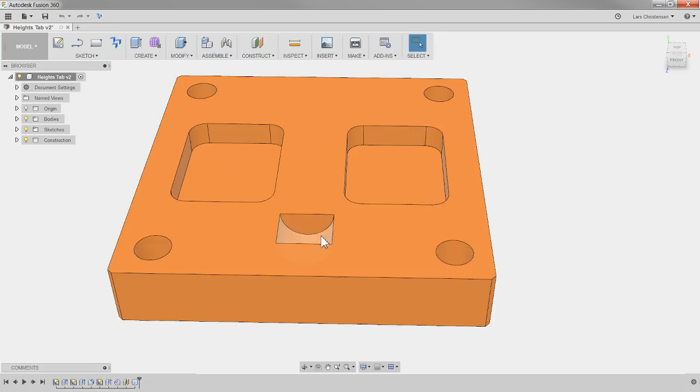Let's go ahead and talk about the Heights tab because somebody is watching this video just for that. Thank you so much, guys. So I have this model here, and I just kind of modeled this up. There's nothing too fancy about this. We got a couple of pockets, kind of this cylinder shape down here, and we got some holes.

What I wanted to do was—I really hate when it turns into a cooking show where everything has already been prepared—so I actually wanted to go into CAM and start from scratch and throw some toolpaths on this. If you've never seen CAM before, you can kind of see the process here. We're going to talk about the Heights tab. The Heights tab is kind of like the distance the tools are moving between pockets or holes or something like that, so it's pretty important. I'm going to show what I think are some pretty neat tips with that.

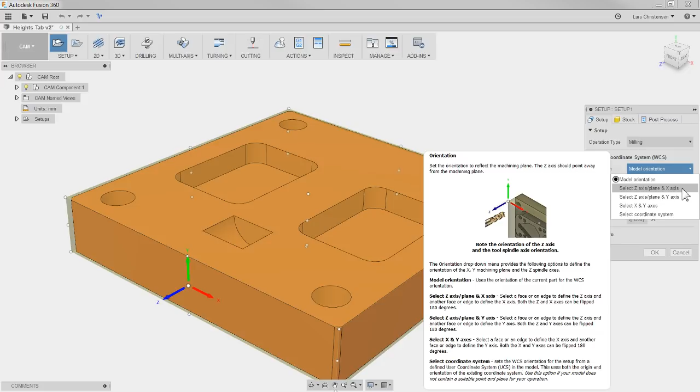Let's get going. The first thing you do in CAM is hit setup, creating a setup. Normally, I always use only the Select Z X plane, I don't use any of the other ones. I've talked about this in the past, so I'm not going to dive too deep into it. I'm just going to select the top of the part here.

Now there's a couple of things that's going to be important when we are talking about the heights. We're talking about the tool moving around on this part, and we're going to dive pretty far into this. But one of them is, where are we picking up the part? We're doing that by normally selecting like a box point. If you're selecting stock box point, you need to know that you're selecting whatever you have in your stock options for the top offsets.

Normally you're leaving a little bit of material on top. Now you got to decide, when you're touching the tool off, if you're touching it on top of the part, or if you are going to subtract whatever. Let's say there was no material left on top—then you would not have any, you could make this 0, the stock top offset. Or you could go in here, instead of doing a stock box point, you could select model box point and select a point.

So that's just one of the things to keep in mind. We're going to see this happening as we go through and talk a little deeper about this. Right now, I'm going to leave it on stock point, meaning there's a millimeter of stock on top of our part. I'll hit OK to that, and let me apply some toolpath.

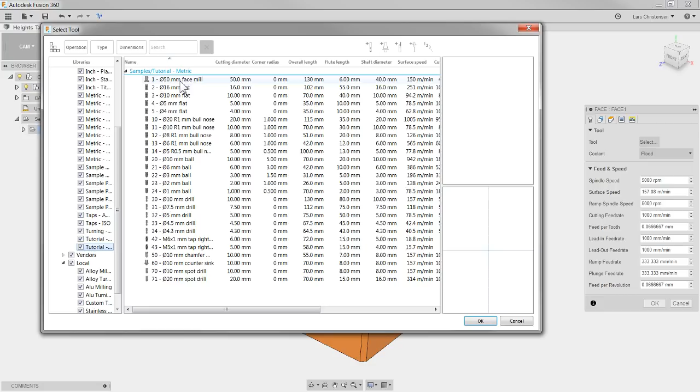Normally when we apply toolpath to a part like this, we might start with a facing operation. I'm going to click on that one and go in and select a tool. Bear with me as I create these tools from scratch without going into all the settings. I'll select the 50 millimeter face mill, select all the tools and operations, then go back into the height tab. Selecting the tool is always the first tab.

Because I'm just facing off this block, I don't actually have to select any geometry. I'll hit OK, and now I have a facing operation here that you're now aware of. If I go back in and edit that operation, yes, we have the height tab here—this is the one we'll be talking about in a few minutes. I'm just going to add a couple more operations.

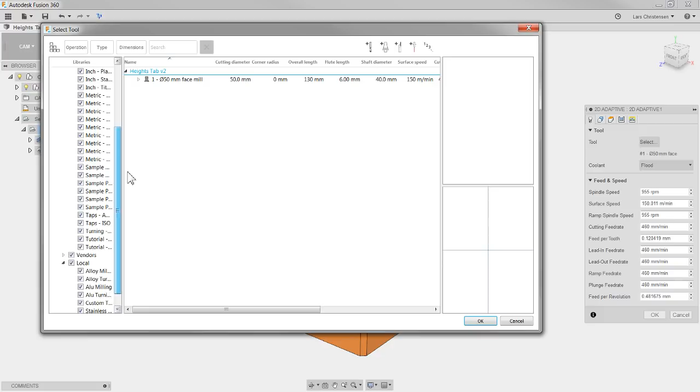So we faced off the part. Maybe we also want to rough out these two pockets—we could use a 2D adaptive clearing for that. I'm going to select a new tool for that, since we don't want to use a face end mill. I'll select from the tutorial metric library here and pick the 16 millimeter, then go to the geometry tab and select the two inner circles.

Again, here you'll also see the heights tab—that's the one we're going to talk about. The reason I'm selecting multiple operations is because the height tab does different things depending on what operation you're in. So there are our two pockets roughed out.

Now that we've roughed those out, we might want to finish them. Normally we use a 2D contour for that. We might select a smaller tool, but right now I'll just leave it at the 16 millimeter and select those same two diameters.

That gives us a finishing operation for that. I might also want to take a pass around the outside, so I could use that trick: right click, create derived operation, go into 2D milling, and find that same contour toolpath. That means all my settings, if I customized anything in the different tabs, get carried over. The only thing I have to do is deselect the two chains and select the outside.

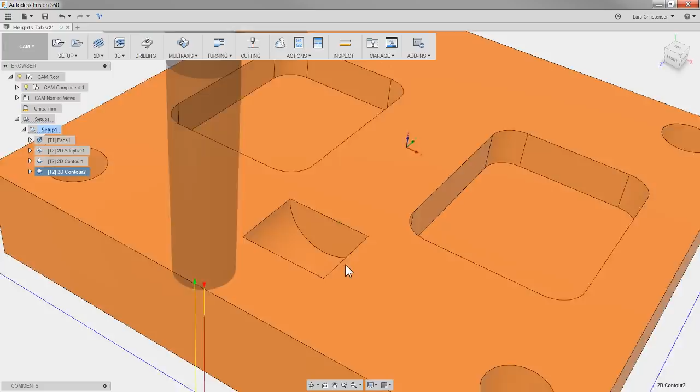So if you didn't know about that little trick—now. I'm also going to do 3-axis toolpath on this part, because height tabs are still important when it comes to 3-axis toolpath. I'm going to rough out this little oval pocket right here, just bear with me. I'll select a slightly smaller end mill since it's a pretty small pocket—the 10 millimeter flat end mill. Now, I've done a live stream on selection within machining geometry on 3-axis, so if this is fairly new to you, I'd recommend checking out that live stream.

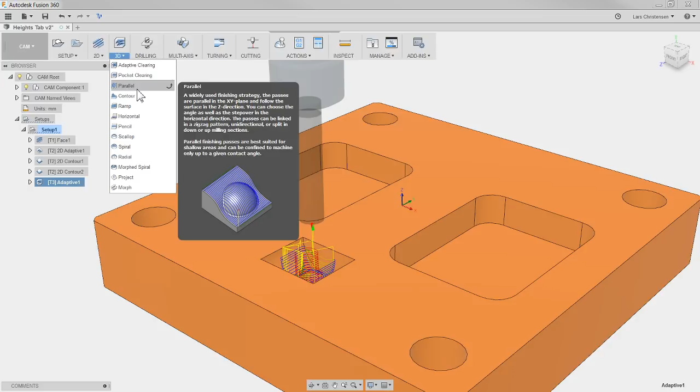I'm going to say I want to machine the cavities and probably also leave some stock here, and that will rough out this pocket. Then we're going to finish it—for that I'll use parallel cuts. Again, I've created videos on some of this 3-axis toolpath if this is brand new for you, but I just want to make sure that when we're done with this live stream in 20 minutes or so, you have a full take and feel comfortable with the height tab.

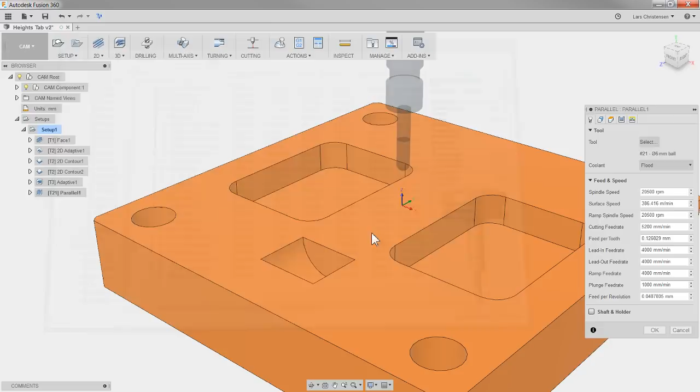So I'm going to select the 6 millimeter ball end mill, a little smaller than the 10 millimeter we just used. Again, go into the geometry here, and I'll also select the boundary—I like to use this contact point boundary for that. Let's hit OK.

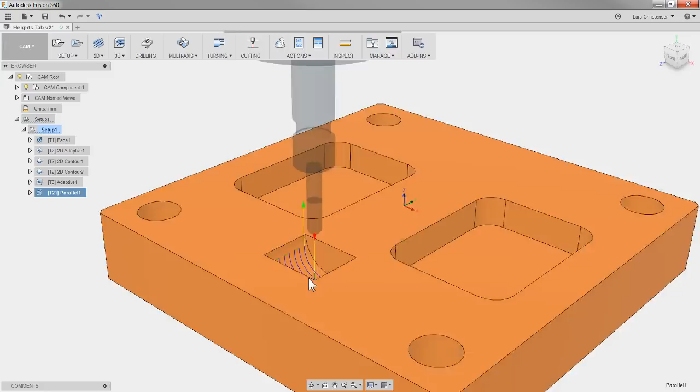That looks somewhat decent down there. That's a good toolpath. Maybe if you're machining this in real life, you'd probably have a lot smaller step over. All right, to wrap this up, I'm just going to do a drilling.

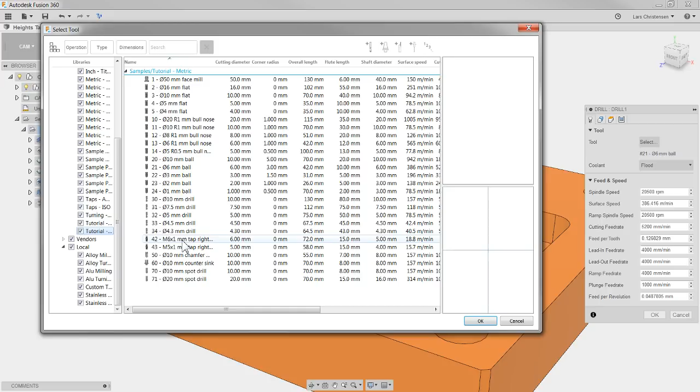I've been through, I'd say, most of the standard toolpaths there are, and we can then start talking about this Heights tab here that I'm trying to get at. I'm lazy, so select same diameter, click on that there, and it will drill these holes.

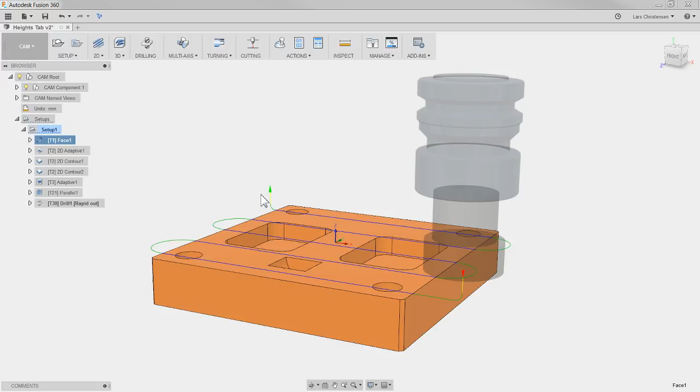Okay, so we created a handful of different operations in here. And when we're talking about the Heights tab, we're talking about, if I click on the facing tool, how the tool is going to approach the part, machine the part, and then how it's going to leave the part again to go to the next toolpath, which in this case is the adaptive, and it will enter the part.

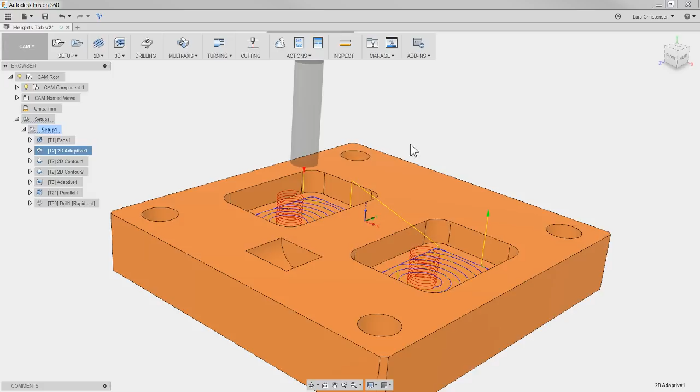But then the interesting thing comes when it's got to make this jump across to the second pocket. That's where I think many people get a little bit confused when it comes to tweaking things in here. So I hope this wasn't too long a setup to getting to the point, but let's go in and digest the different types of toolpath and start tweaking them, talking about the Heights tab.

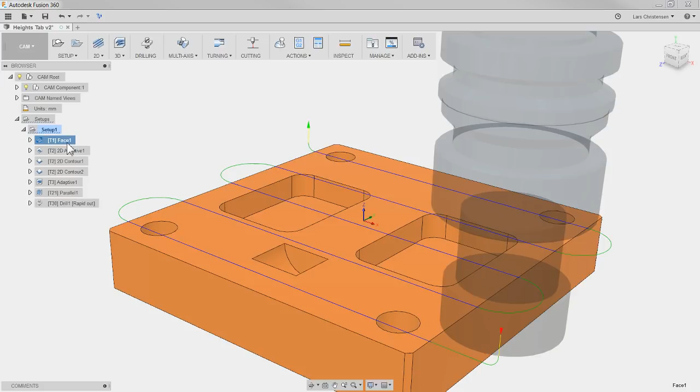The reason I didn't just do a facing operation is because if I right click and hit edit on the facing operation and go over to the Heights tab, you'll see there are actually 5 different categories in here. But if I go to the adaptive and hit edit and Heights tab, you'll see there's only 4. It's kind of funny. I think most machinists would tell me that facing operations would be a lot simpler than a 2D adaptive, but for the Heights tab, actually not so much.

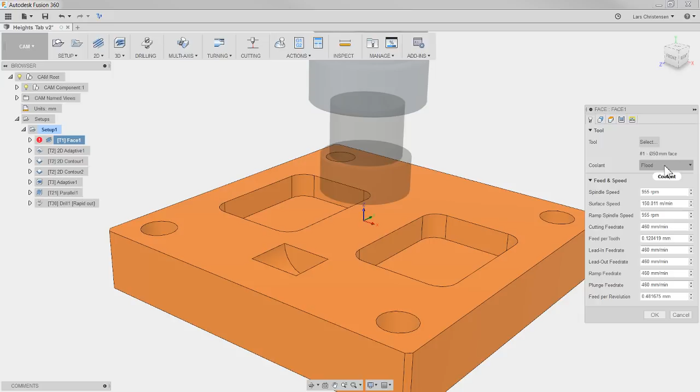So here's the trick when it comes to the Heights tab. I always tell any training classes I do in CAM: start from the top and work your way through the different menus. So when you get in here to tool, select your tool, choose your coolant, make sure your feeds and speeds are right, go into your selection, make sure you've got that selected. Now when it comes to the Heights tab, I actually recommend going from the bottom and up. Start from the bottom and work your way up.

The reason for that is that if you've ever programmed a CNC machine, the bottom is normally your first concern. How deep is this end mill or drill or whatever tool actually going down to, what is the lowest level it goes? And if you start with that, you can work your way up.

So in here, you'll see that by default, the bottom depth right now is set from model top. Now, if I hover over it, I get this Cheesecake Factory of a menu that shows up here, showing you all different kinds of things. Get a cup of coffee, read through this—it's good information and definitely a lot helpful.

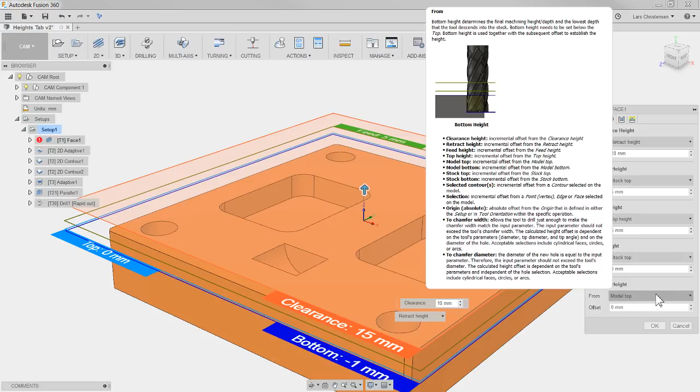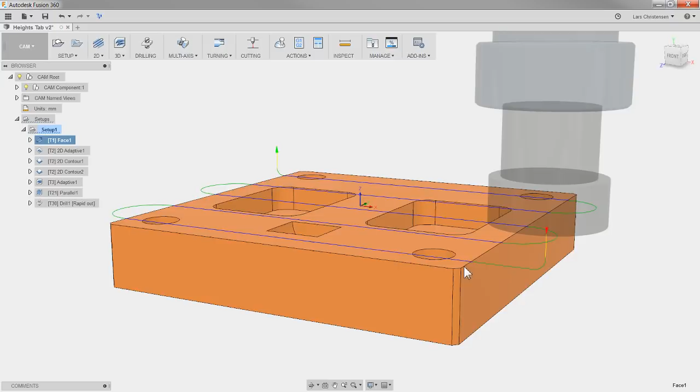Now what happens when I click on the drop down is you'll see I can choose where that bottom height is—let me click outside. So by default here, for this facing operation, it's set to model top. That means when our tool is approaching the part, it's not going to machine any deeper than the model top. But that's good, right? We can breathe a sigh of relief, because if a face mill went down to the bottom, that would be ugly. So that's where you can look at that.

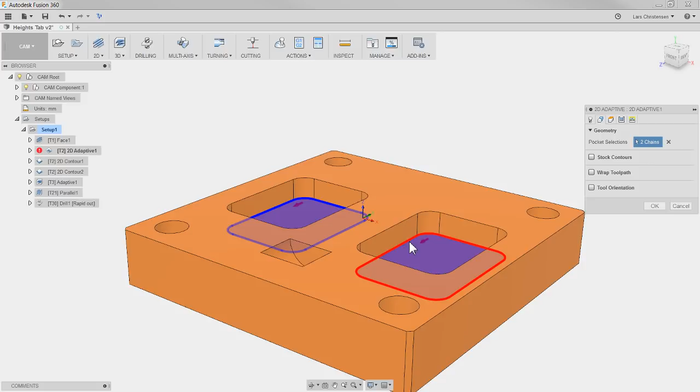Now if we go and look at the 2D adaptive, that goes down to these 2 pockets. If we right click and select edit there and go to the Heights tab, go down to the bottom, you'll see that bottom height is from the selected contours. What the selected contours are—if I go back to the geometry tab—those are the 2 edges I selected at the bottom of the pocket. That means right now the adaptive looks pretty good, right? It machines all the way down to the bottom of this pocket.

Now if I go in and change it, so instead of the bottom, I select the top and hit OK.

See what happens now? It will not go any further down than that selected edge that I have selected, because on the heights tab, it's set to the selected contours, meaning the contours that I selected, right?

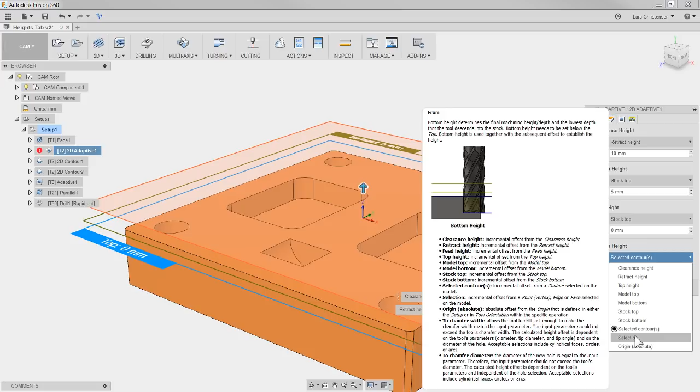Now you have different options in here. I could go in and say, instead of doing selected contours, I'm going to hit selection. Now if I hit selection, it's looking for somewhere, what is that selection? And I could actually select the bottom of those two pockets and hit OK. Now it will be back to where I want it. So that's how this kind of works in here.

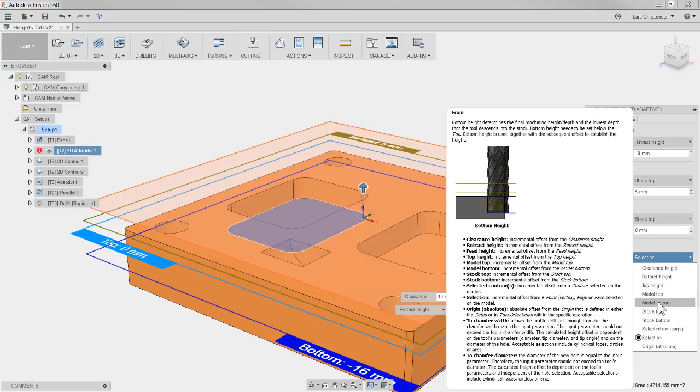Now I could also go in here and say, for example, model bottom, and select that. And now you'll see it's going to go all the way. That's not going to be good, because now it actually goes all the way down to the bottom here. So concentrate - the first thing we should always do is concentrate on that bottom height. That's the first one, and just make sure that has the right height. If that is good, that is the most important thing.

Now, anybody ever played with Legos? That is kind of like how this works. So after the bottom height, we go one up and look at that. Now the one on top of that is set to what is the top height - kind of like telling us where is the zero, Z0, for our tool.

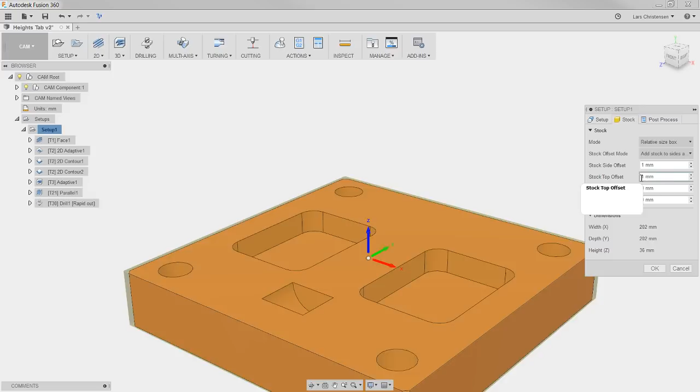Now right now it is set to stock top. So stock top, well that would be - if we go into our setup, where we were before - that would be that 1 millimeter, that is the stock top that is on top of the part.

Now so we have eliminated these two - this is the top height. Now the next one is retract height. This is when it moved from one pocket to the other pocket - what is the height it should be at when it's traveling from one pocket to the other? That is stock top. What we just defined was the same one we had here, top height, right? That is 1 millimeter above plus 5 millimeters, so actually a total of 6 millimeters, right? Because we had from the top of the model, we had 1 millimeter on the stock, and then we are going 5 millimeters above that.

So we should actually clear this area here with 6 millimeters, because this is after the facing operation. And then when we go to the clearance height - clearance height is when the tool approaches from the beginning, like when you hit the green cycle start button, and it's going to approach this operation. When it's approaching the adaptive operation, it's going to do a clearance height, and the clearance height is the retract height - what was this here? That was 6 millimeters above the model top, or 5 millimeters above the stock top. So it's that retract height plus an additional 10 millimeters.

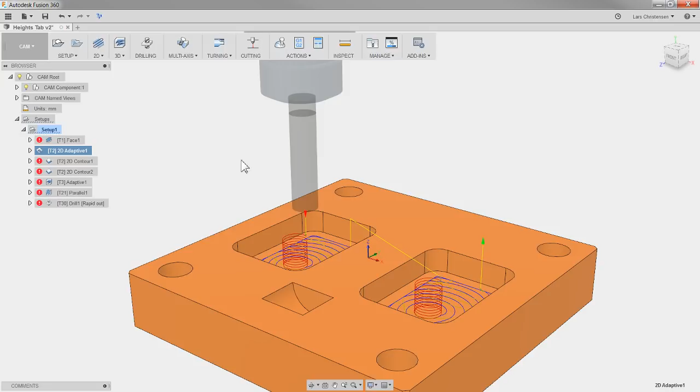Okay, now I'm going to show you a pretty neat tip so we can talk a little bit about this. So for this operation, I'm just going to hit OK for this adaptive, let it process. Here's a neat tool you maybe don't know about: if you right click on an operation, there's a command called View Toolpath. Click on that,

and we actually get this reference code for our part - not the posted code, but a reference code. And what you will see is that there is an XYZ, XYZ, and so on for this whole thing, and it shows us kind of like going through the entire cut. If you click here, you will actually see that the tool will follow along. So this is a great way - if you're a little bit unsure programming something, this is a good way to kind of work your way through this,

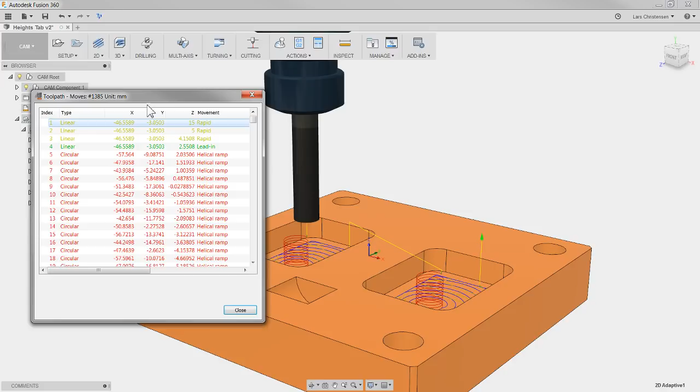right? Now this one here is a little bit interesting because it does have the helix on it, right? We're doing a helix ramp for this adaptive. And not to try to make it more confusing, but the helix is actually - if I go ahead and edit this toolpath - controlled on the linking tab over here, right? And that actually has a vertical lead in, lead out radius on top of that, okay?

So what happens is that when it comes to the top height, then it's going to add this 1.6 vertical lead in to the top, and that's where the cut's going to start. So maybe this is not the best one to look at. Maybe we should look at this one instead, the contour, just because the helix might make it a little bit more confusing. So let's go and look at the contour here, edit this one, go back in and look at the heights tab, right?

So this one here actually has an extra one. It has a feed height on it. So again, don't worry about it.

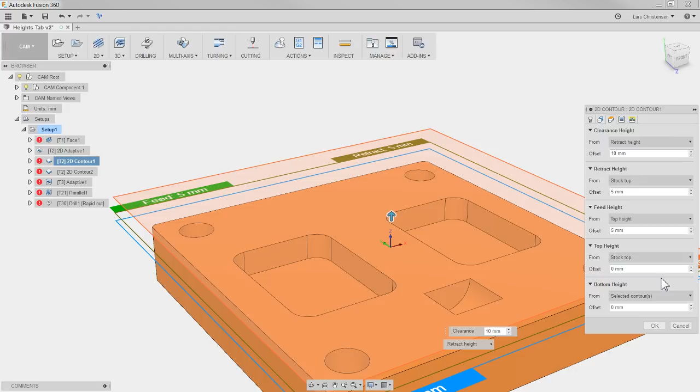Start at the bottom. What is the selected contour? In this case, it is again the selected contour. So what was the selected contour? That was what I selected down at the bottom of the pocket.

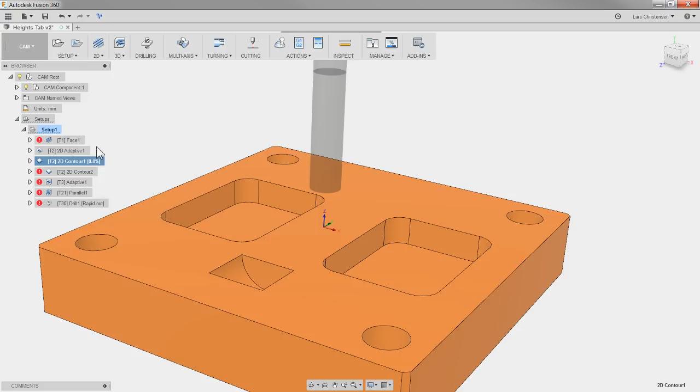So no panic there, we got that. Then it's asking, okay, what is the top height? Again, it's set to the stock top. And the stock top comes out of our setup, like I said before. What do we have here versus that number set right there? Okay, so that is the stock top here.

Then we have a feed height. Now the feed height is set to the top height. That is this one. So it's the top height plus an additional 5 millimeters. So stock top plus another 5 millimeters. That's when it's going to start feeding.

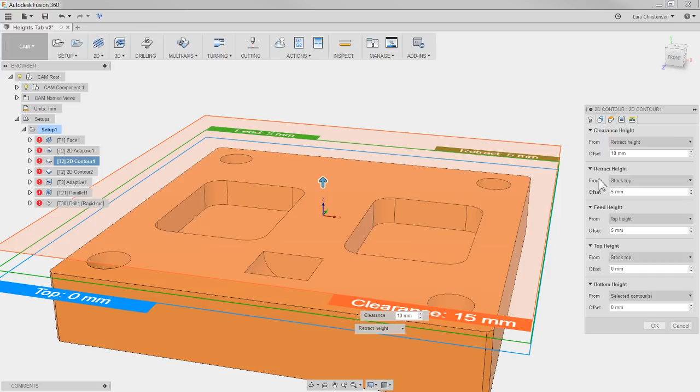It's going to go into a feed rate mode, so it's going to go from a rapid to a feed rate. We have, again, the retract height going from one pocket to the other pocket, but it's also stock top plus 5. So these two are actually the same, right? Because the top height is stock top plus 5, and up here, retract height is stock top plus 5.

I mean, you could go in here and you could change this to top height, and that would be kind of like the same thing. And then on top of that, we have the clearance height. So the rapid for the beginning of the operation, what is the top height plus 5 plus another additional 10. So they're building on top of each other.

Does this make sense? I hope this makes sense. Start with the bottom, and then they're kind of building up on each other. Okay, I'm sorry if I'm making this more confusing than it is. I'm not meaning to.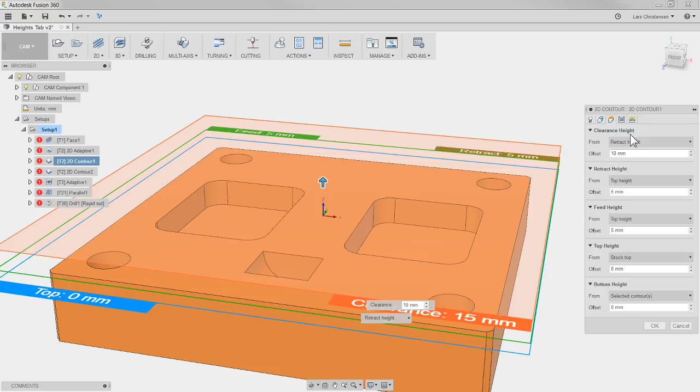So to go back to where we were before with the linking tab with the lead in, you will see here we have this vertical lead in radius, and we could change that to maybe, let's just do 2, some number we can kind of see in the code.

And if we now right click and do that toolpath compare, and we look at this, we will see that the first one is 15 millimeter rapid. So the tool will come from the tool change position. It will go to 15 rapid. It will go down, whoops, I'm moving my mouse here.

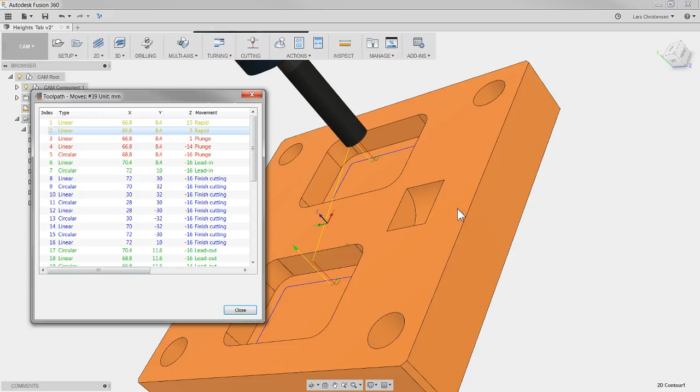That was not good. Let's zoom in so we can see a little bit better. So the first one is 15 rapid, then it's going to go to 5 rapid above, okay? Then it's going to plunge down to 1 millimeter. So this is kind of like our start feeding point, and then it's going to go down to that 2 vertical that I changed on the linking tab, and then go down to 16 as the finished depth, okay?

And then it's going to start machining around this part. When it gets to the point where it's going to lead out, it will go 2 up, because that was a vertical lead on the linking. It will rapid up 5.

Now, I can't spin it around with this menu open, but this 5 here is that top height, is the top height, or the stock top plus 5, right?

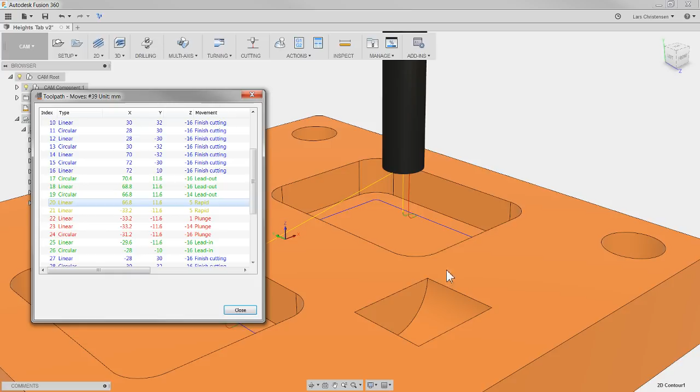And then it will do another move over. That is in the way. That was our retract height. Is this move here? Your toolpath. So that is our... it's going up. This is our retract move.

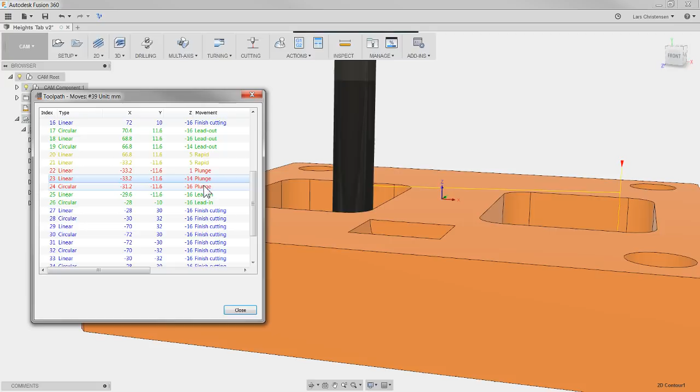Then it's going to go down 1, down 2 millimeters above the radius, and then down to the depth. That's kind of like how that works. And it's really the same.

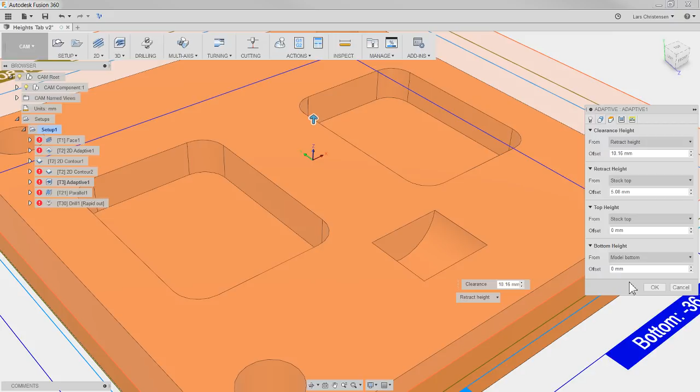Like if we're going to look, so I added a 3D adaptive because I wanted to show you that if you go in and look at the 3D adaptive, what roughed out that cone shape here, you will see it's the exact same kind of idea, except this one by default goes to model bottom, but because it's a 3-axis toolpath, a 3D toolpath, it is not controlled by a selection.

It's actually controlled by where there is material. So it knows in this case, I can't cut into material. That's one of the great things about 3-axis toolpath that you find up here, is that it will not gouge into the material. But you could use this to, for example, set a selection.

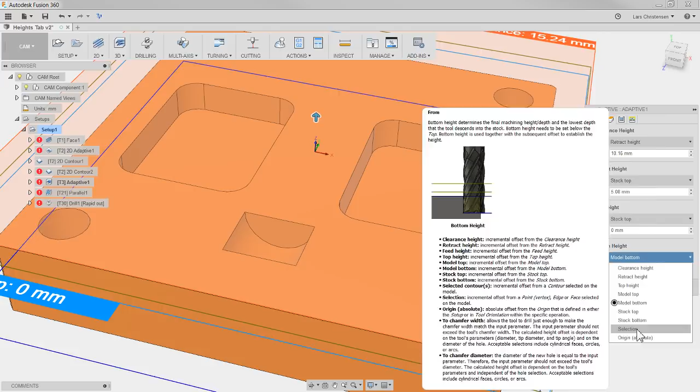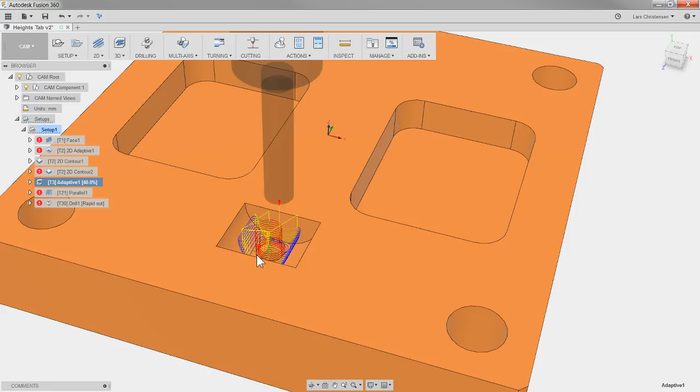I could go in here and select a vertice, pick that point, and now it can't machine any deeper than that point—it'll just do a flat. Versus if I tell it to go as deep as you want, in this case it's always set to model bottom because it cannot gouge into the material, you'll see it goes all the way down to the bottom. Everything else within the 3D toolpath works the exact same way—they're built on top of one another.

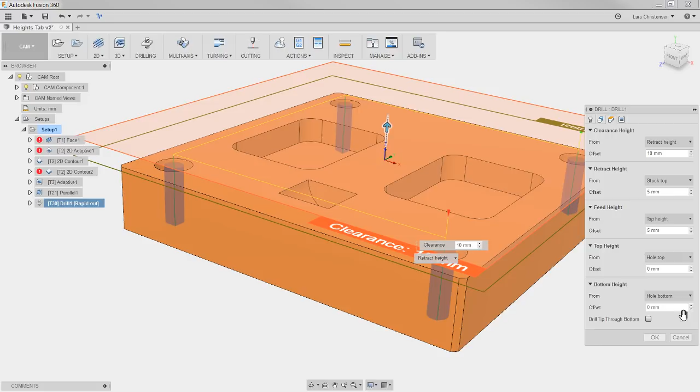Before I go to the drilling, let's do the drilling first, then go one step backwards. Let me open this one. Let's go ahead and edit the drilling, heights tab. We get a couple more options down here. Now it's set to hole bottom, and be aware with drilling that the top height is normally set to hole top.

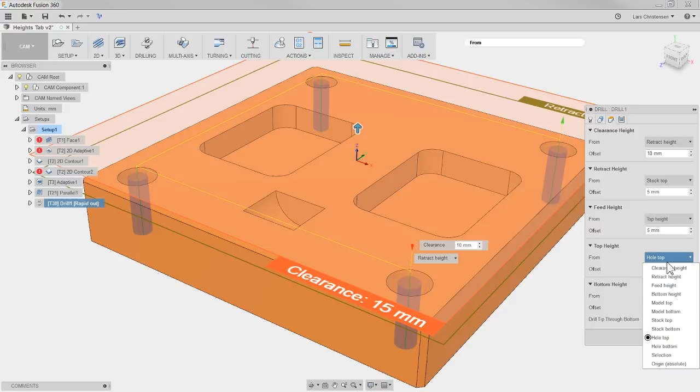So if you had a counter bore, for example, with an extra step down, and you selected the smaller diameter, be aware that the hole top would be at the top of that smaller hole. I should have created a counter bore. So you might have to go in here and instead of hole top, maybe select model top. In this case it's going to be the same. That's one thing to be aware of with holes.

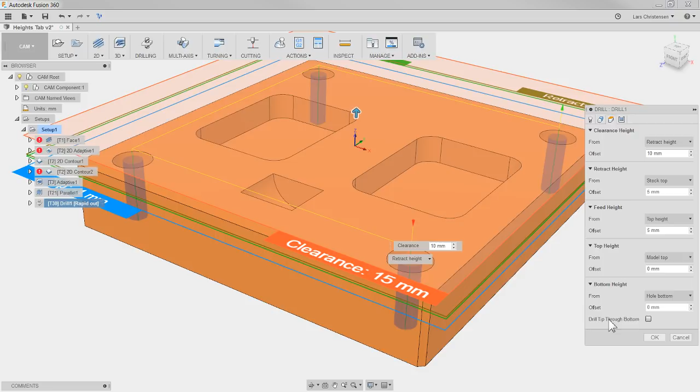But these up here are exactly the same as we just talked about before—they build on top of these. Now you also get an option here to drill tip through the bottom, which is really handy. You check that, and now you can add a little bit of breakthrough.

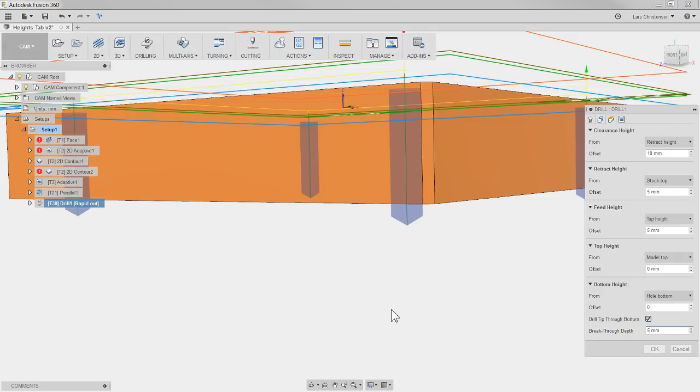Because normally if you have a jobber drill, it has a 118 degree angle tip, so you could go in here and say I'd like 5 millimeters—not offset, I want 5 millimeters breakthrough—and you'll see that now it makes sure the drill goes past the drill tip. Of course, make sure you don't drill into anything like the table. So that's a little caution. That's what we have with the drilling.

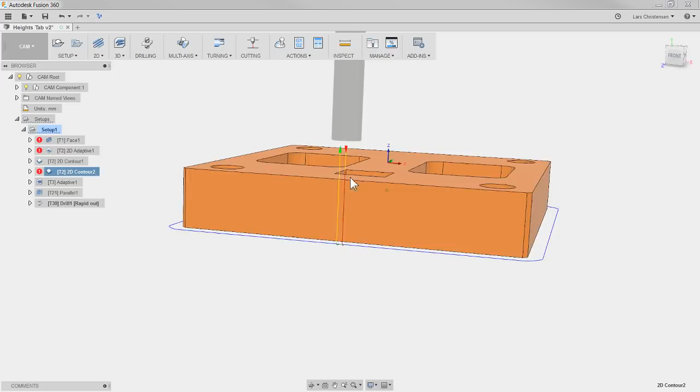Now the other thing I wanted to show you, which you may not be aware of: if you go into the toolpath I created here, where I machined around it, you can do something a little more advanced—or at least you should be aware of some of these functions inside of Fusion. You can actually create rules in any field that has these fields in them, making expressions. To me this gets a little geeky, and it's definitely not something you have to learn to use Fusion.

But if I right click in one of these white areas, you get a couple of options. First, you can make any of these fields default, which is super good. If you know that every time you use stock to leave you don't like 0.1 millimeters, and you're sick and tired of always changing it to 1 millimeter, you can right click and say make this default, and from now on anytime you do a 2D contour and click stock to leave, it will always be 1 millimeter instead of 0.1. That's super helpful. And if you change your mind, you can right click again and say reset to default, and it will go back to the built-in default, how Fusion came, and switch back to that.

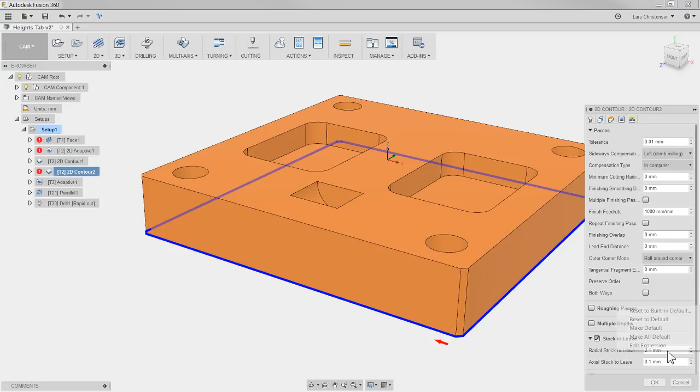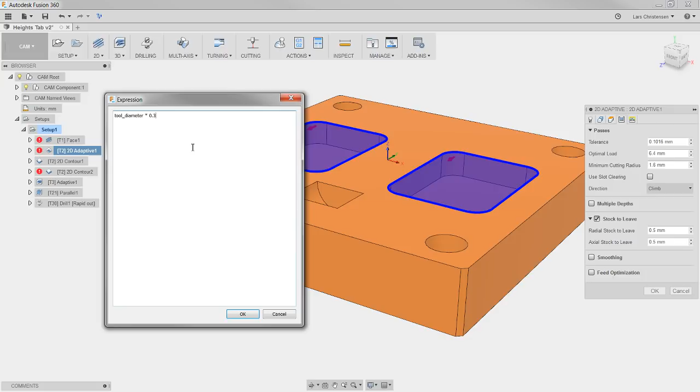That's one thing. The other thing in here is something called expressions. You click here and you get a field. If we go into adaptive—many people ask me about this optimal load, and I did a live stream on adaptive clearing, so if you want to know more, search the live streams or send me an email and I'll send you a link. But if I right click and select edit expression, you'll see that this optimal load actually has a formula: tool diameter times 0.4. So this optimal load will change by default based on tool diameter times 0.4. Now you can change this—if you find on your machine that 0.3 would be better, you can change that, make it the default, and you're all set.

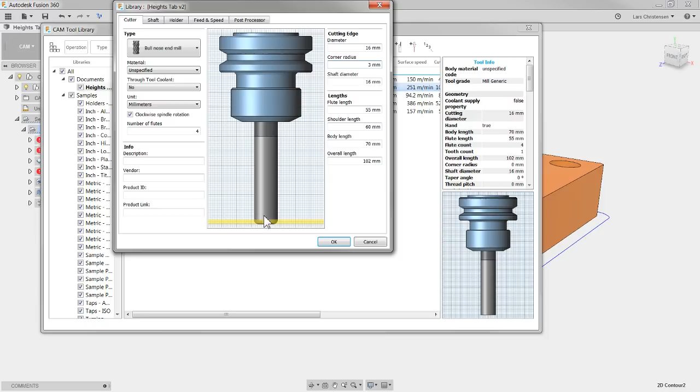We can also use it on the heights tab, which could be interesting. If I go into this tool here, this is a 16 flat end mill. What if I change that to a radius cutter or bullnose end mill, and add a corner radius, for example 3? So now we've got a 3 millimeter radius down here.

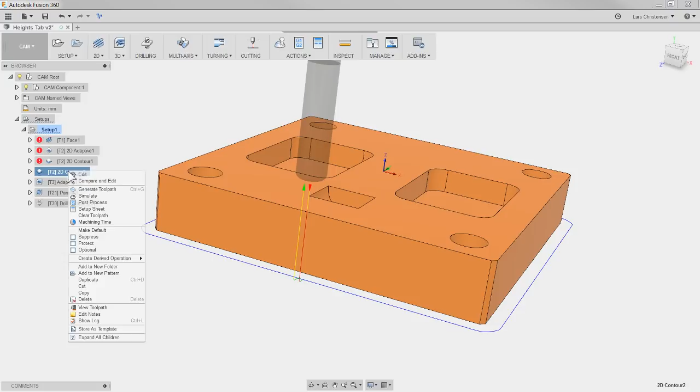If I go in and say okay to that and let it process, creating the toolpath around this part, well if you've done any machining you know that with this depth, we will have that little radius there. You could go in here, hit edit, go into your heights tab, and if this is a problem you're running into all the time, right-click and hit edit expression.

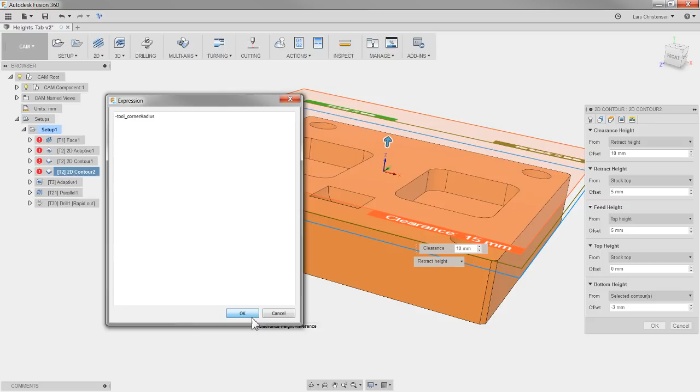I could go in here and change this to an expression. Now I don't have the list for expressions memorized, but if I type in minus tool underscore corner radius, that means now it will always go minus whatever the corner radius is on whatever tool I select. In our case, 3 millimeters.

So now when I hit OK, you'll see that the depth is going to be 3 millimeters deeper, to make sure the radius doesn't affect that bottom. To prove we actually did it right, let's go back in and change the tool again.

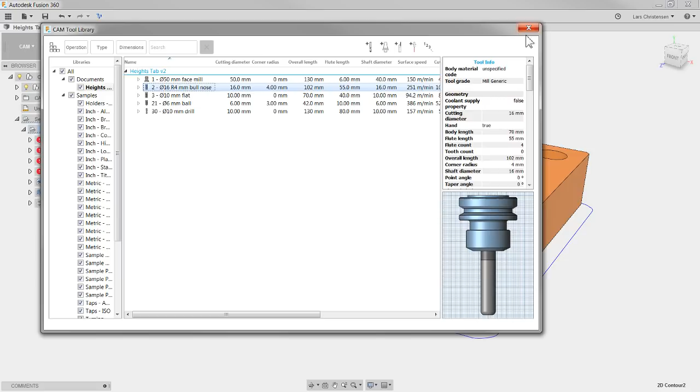Let's make it 4. I don't know why that's not really exciting, but 4 it is. Let's go in here and regenerate that. Edit it. And now you'll see that it automatically changed it to 4.

I'm using the same tool on finishing these pockets, and right now it looks good, but when I regenerate this, will they go too deep too? Oh no, they will not—oh, because I didn't make it default in the other operation.

I just put it in for the contour. So if I wanted that to stick all the time, I would now have to click in here and say make it default, and then whenever I select it or regenerate, it will be applied. I don't want a default, so I'm going to go ahead and say reset to default. But I hope that makes sense.

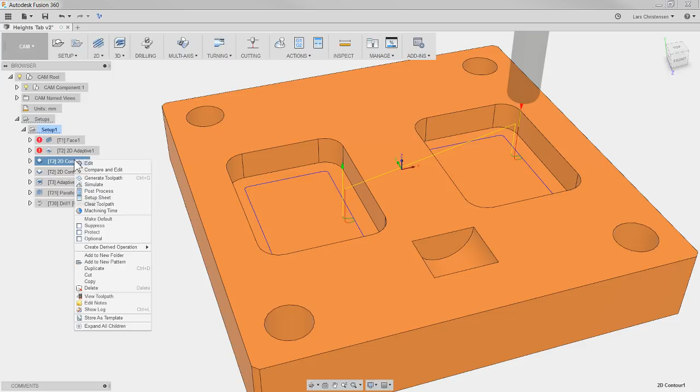So a little bit more advanced in the end, hopefully not too confusing. To wrap it up, just start from the bottom, make sure that one is good. That should be pretty self-explanatory where those numbers come from, and just work your way up. If there's any confusion...

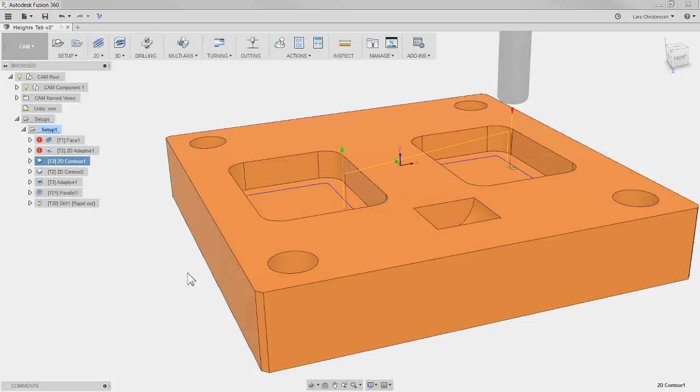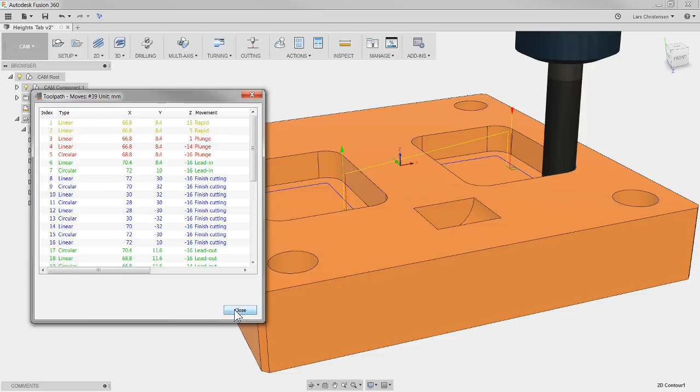Right-click, select View Toolpath, and you can click through each step and see that cutter machine around, and you've got the Z value over here. And don't forget that these numbers, these Z values in here, are deriving from the setup. So in our case, we had set the 0,0 to be on top, that 1 millimeter on top of the stock, which is what we had set over here.